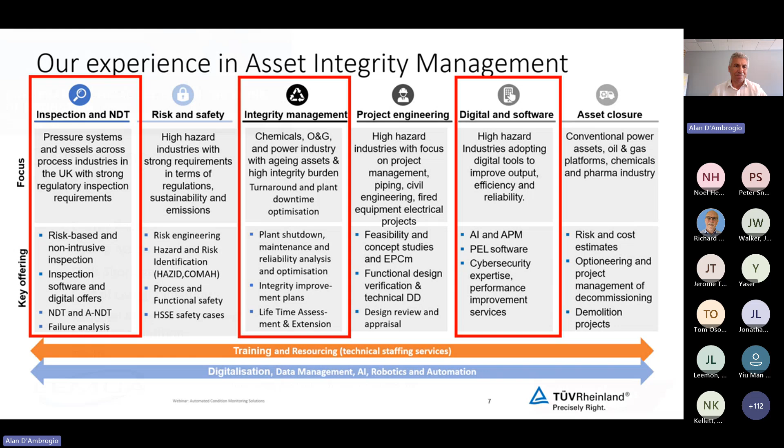Why are we here today? If you look at the news, we have very challenging markets at the moment, especially across Europe - high energy prices, aging assets, skills shortage, cost of living, inflation, impacted even further by the Ukraine war. That's resulted in a lot of operators in chemicals and refining with reduced margins and much greater increased global competition. And in the last 12 to 18 months, we're starting to see tariffs as well. So that's some of the climate.

But for me, 2025 has been quite noticeable on some of the announcements we've seen. The first one is Petro-Ineos in Grangemouth, around the refinery being shut down. That was announced last year, but in April it started its shutdown.

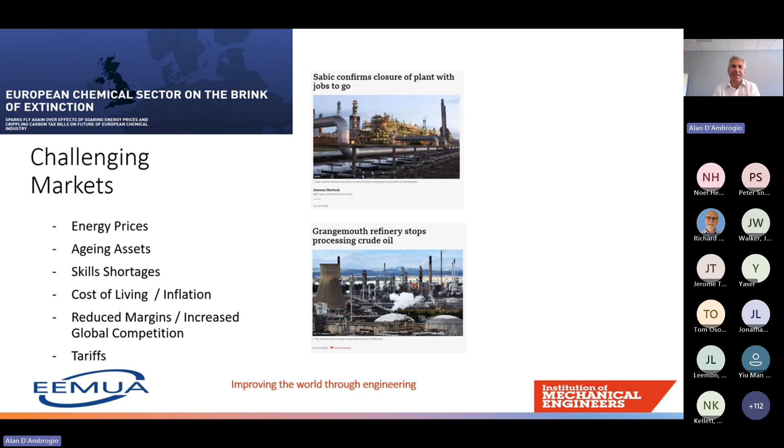Unfortunately, SABIC have an ethylene cracker on Teesside that's been shut down for a while for a large revamp and decarbonisation project, and the decision was not to start back up, with the resulting number of job losses. In July this year, you'll have seen Prax gone into administration, and that's a refinery in Humberside.

Lastly, Vivergo, again in the Humber region, the bioethanol plant has decided it can't operate competitively. So quite a strong headwind around competitiveness in European chemicals and refining.

And if you look at the top left-hand side, it says the European chemical sector is on the brink of extinction. I didn't make that up, that's on the INEOS website. INEOS is the second largest chemical company in Europe, and that's on their website.

So we're seeing strong headwinds in there. And the question is, what can we do to help? My background, I spent 4 years within ICI as a turnaround manager, so I just wanted to talk about how asset integrity and major turnarounds have an impact.

You'll see in the top right-hand corner the turnaround manual we had in ICI, issued in 1995. Turnarounds tend to be infrequent events, maybe every 4, 5, or 6 years depending on the plant. Some plants do them more often, but we see lots of confined space work, bringing a lot of contractors onto site.

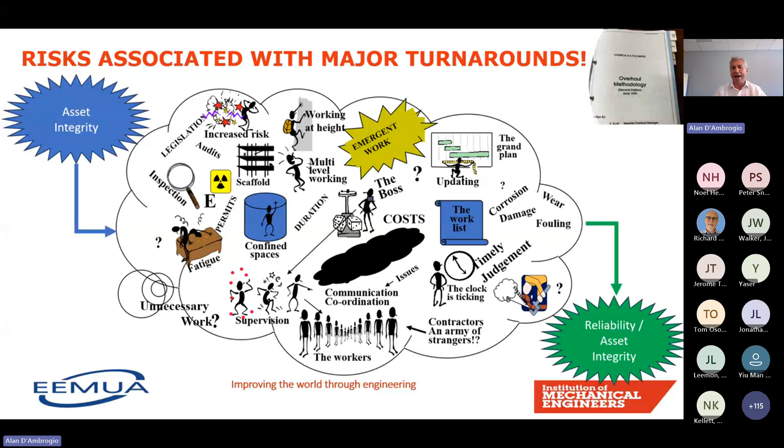We have this large event that we spend millions on. We bring a lot of strangers onto site to actually do some work. But what that event also does is define the asset integrity and reliability of the plant for the next 2, 3, 4, 5 years, whatever the interval is between turnarounds.

So how does asset integrity impact turnarounds and business profitability? Turnarounds tend to be the single biggest contributor to business performance in the financial year they're in. That's from the maintenance spend, the lost production, availability, OEE, production efficiency, whatever you may call it, and potentially also safety performance, because of the complexities of the work being done.

So asset integrity has a huge impact around business profitability, both as an output around the performance and safety of the plant, but also as an input on what we spend on that plant. When I was in the turnaround team, we always used to have a saying: to succeed in a turnaround, you've got to get everything right; to fail, you only have to get one thing wrong. That comes back to the complexities of turnarounds.

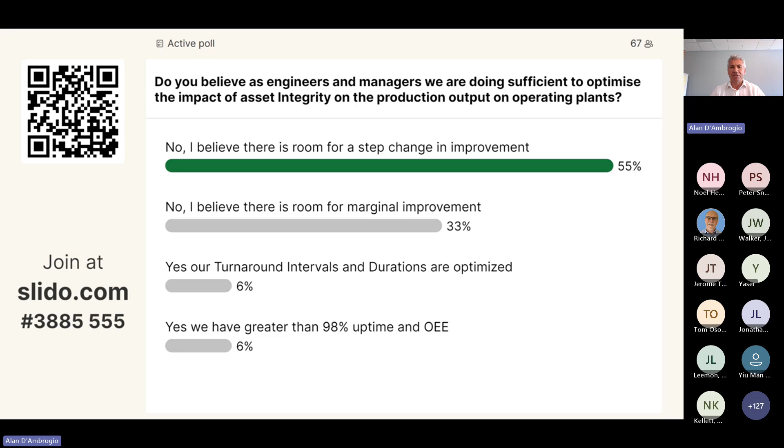So what we're trying to do is the IMechE, we want to try and transform asset integrity. It wants to be balanced. We don't want to have a safety incident. If we have a safety incident, it has a huge impact, whether it's on a turnaround or during operating plants. But we want to enhance the safety performance, increase production, and reduce our operational costs. That's what we want to try and do. And we want to try and bring industry together to look at how we can do that, utilizing the new technologies around. We've got AI, but also upskilling people on operating plants and people that support operating plants across there.

On the right hand side, you'll see Formula One. It was the first Formula One that was run 75 years ago. And in 1950, the average pit stop during Formula One was 67 seconds. In 2025, so 75 years later, we're talking about an average pit stop between 2.5 and 2.7 seconds, and the fastest is 1.94 seconds. So we've seen a radical step change around how those cars perform and how we maintain those cars.

So what we want to try and do is bring that same force, that same thinking, into the high hazard process industries. It doesn't mean we will do our turnarounds in 60 seconds or 2 seconds, but it does mean we will adopt the technologies that we see in other sectors into the high hazard sector. So more effective asset integrity strategies, shorter and more cost efficient turnarounds, maybe increase the interval between turnarounds if we can as well, but improving the uptime and production output. So that's what we're trying to do.

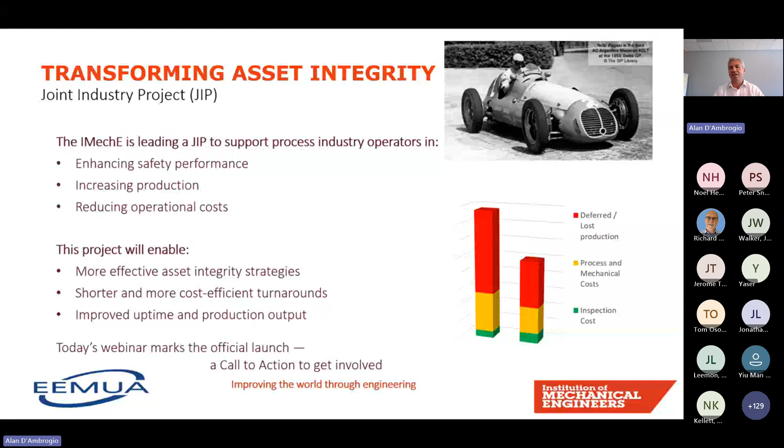If we understood what the condition of equipment is, maybe we can do things differently and we can transition to what we see on the right-hand side. I'm not going to go through this slide, one for time, but also David Glass will talk about this in his slide as well. In the UK, there is no legal requirement to go into pressure vessels. I know that's different in different parts of Europe, though. But I'll let David go into this slide.

I've just put 3 slides in, which is the case for change in there. And then I'll hand across to the other speakers. Sorry,

upstream. Back in 2017, we were then part of ABB. We actually conducted a study for the Oil and Gas Technology Centre to look at how we can support upstream operators and what's stopping the uptake of advanced technologies and non-intrusive inspection.

So we conducted a survey across a number of operators. What we found as the outcome is there was a low level of NII usage in the basin. There's a potential, when we did interrogation on a number of companies, for a 42% cost saving. I know some of these facts are disputed, but for me, the biggest thing is there's a lack of visibility across many operators of what the true cost of asset integrity is.

And this is another picture of the same things. There's many barriers for uptake of technology, behavioral and commercial. It's not just about the technology. So number two, opportunity for change, was a study that we did from 2020 to 2024, and that was to implement asset integrity across a number of refineries and ethylene crackers in Europe.

So there was an opportunity to reduce it. The main reason this study was conducted was to stop the unplanned outages and stop the failures. It wasn't to cut cost, it was to stop the unplanned outages and failures.

But what we did find is by emboldening asset integrity, by digitalizing asset integrity across the sites, looking at equipment criticality, corrosion control, and so on, we were able to bring new inspection techniques and new ways of working that actually supported OPEX cost reduction, improved safety, and improved uptime. And I'll talk about this a bit at the end as well around some of the values we did there.

What we also did for the operator right at the start is produce this thing called the value gap. And you will have seen that value gap when we talked about offshore. And this is one of the deliverables we'd like to see for the joint industry project: what is the value gap for us to do something differently? And what are the challenges for us to do something differently?

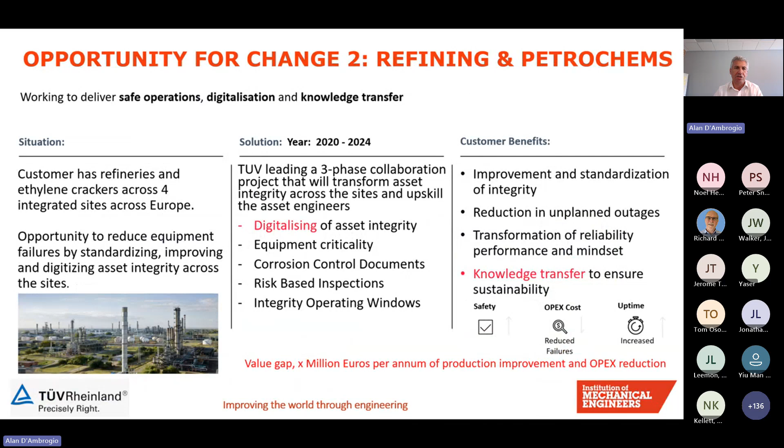We've also seen a lot of drone usage and robotics and how that can benefit as well. So how can we bring that into how we conduct asset integrity, and then data analytics and artificial intelligence in there. The last part we won't cover in the JIP, but there is a webinar in a week and a half's time by the IMechE that will cover this, and you'll see that on the end slide.

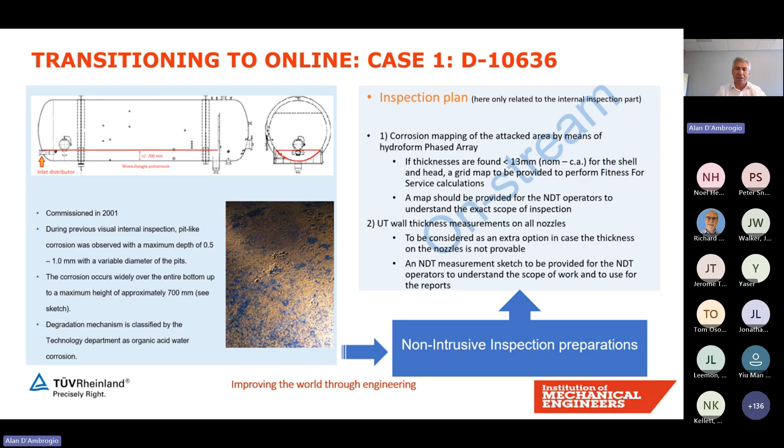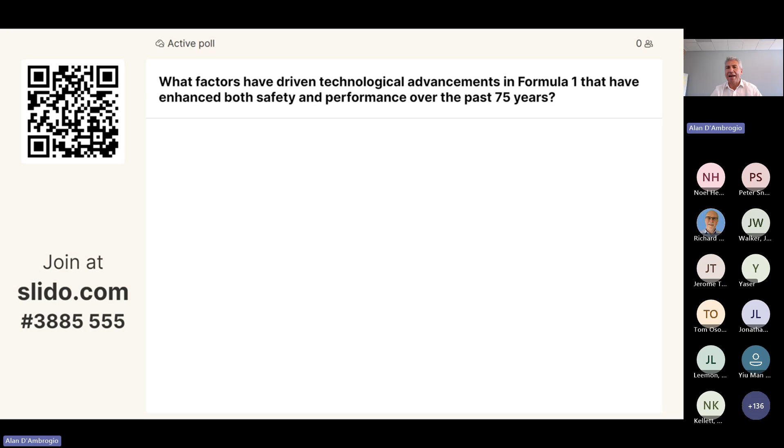Okay, poll question number 2. What factors have driven the technology advancements we saw in Formula One that have enhanced both safety, Formula One cars are safer than they've ever been before, and performance over the past 75 years? What's driven that? Maybe that's lacking in our process industries. And this is a word cloud. If you can type your responses in there, short or long, it'd be good to understand what's driven that industry that we're not seeing in our industry.

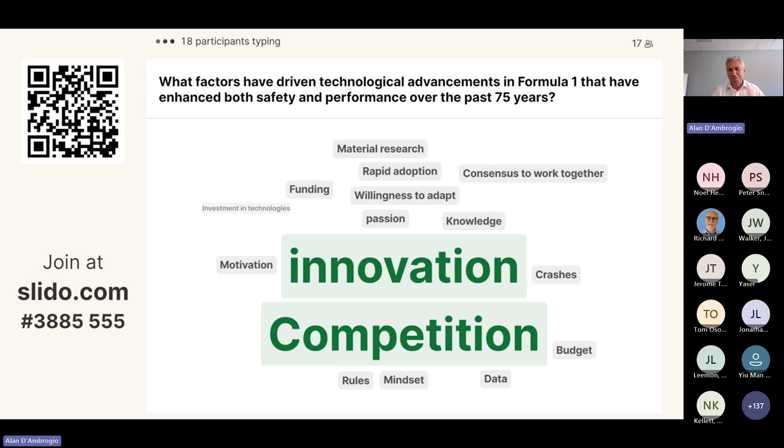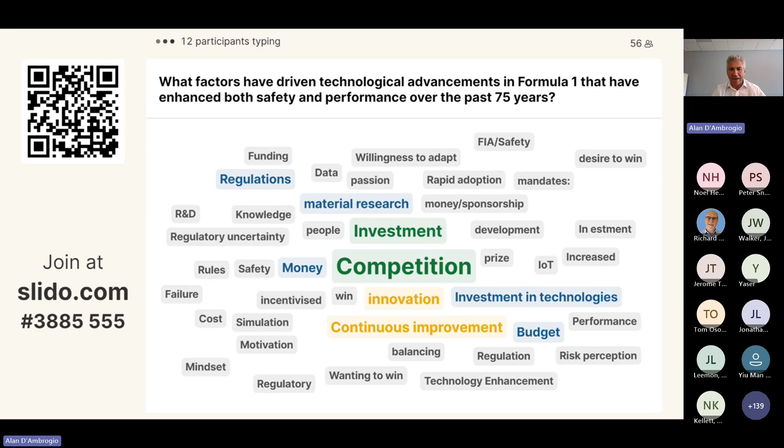So competition, as a service provider in the high hazard industries, I would say there's a lot of competition in the high hazard industry. Investment, maybe innovation, budget, regulation, FIA safety. Willingness to adapt, mindset. I saw right at the start, motivation, wanted to win.

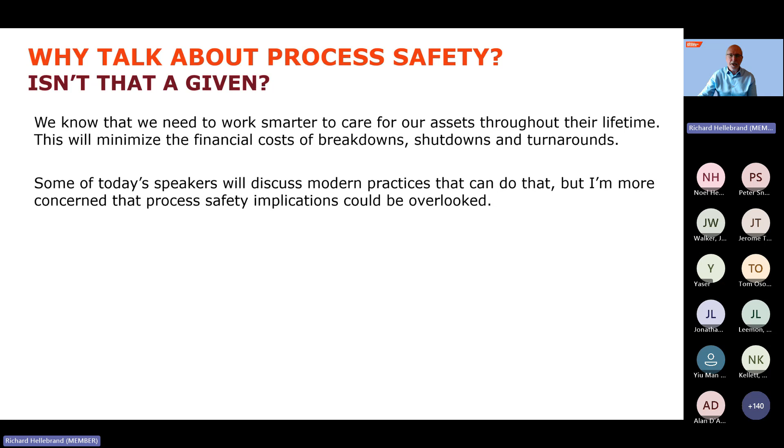So, isn't it a given that we have process safety? Well, we do need to work smart. We know that on maintaining assets through the life, we've got to get the costs down, and those come from breakdowns, shutdowns, turnarounds. Alan's already alluded to that. And some of the speakers will talk about some good modern practice that can do that, but I'm really concerned that process safety implications could be overlooked.

So I'm going to look at a few examples of failures that were avoidable. And they include big near misses, if you like, and small events, but they were almost disasters. Unfortunately, I have a whole catalogue of these things I could share, but I'm not really allowed to because of confidentiality. So the fact we're repeating these things, it sort of hints at declining technical competence and knowledge in the industry. We want to arrest that, obviously.

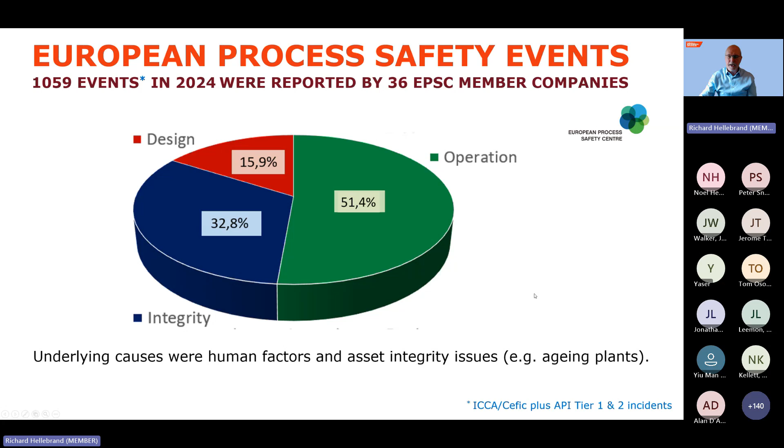This pie chart is compiled by 36 European-based multinational chemical companies. To give you a feel for this, the combined working hours for those incidents was 2.5 billion working hours. All of their internal incidents that are either CEFIC based or API tier 1 and 2 based are reported and analysed. And you can see more than half are operations, and when we look through them, really we're talking about human factors, and then a third are asset integrity as well. There's no clear dividing line between them, because knowledge can often lead to asset failures. So I'll give you a few examples.

I'll start off with flanges. Now, this is from 2021 in the US. They were trying to start up a hydrogen fluoride unit. An operator noticed a small leak at a flange. He went over with his BA on and checked it, radioed for help, and another operator came over, but the joint suddenly blew out. And the second operator didn't have the right PPE. He died.

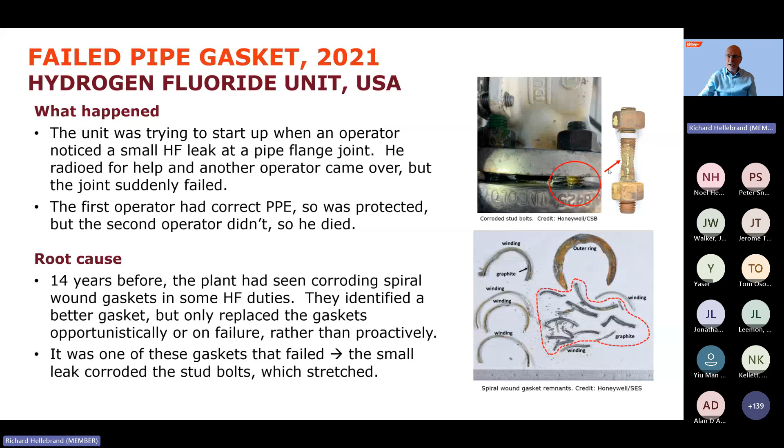But 14 years before, they'd identified corroding spiral wound gaskets as a problem in these duties. They found a better gasket, but they decided just to wait for them to fail or to change opportunistically rather than proactively. And that resulted in someone dying, because you can see from the photo on the right, we had stretched bolts, and then obviously it failed, and you can see the state of the gasket.

Another example, this was from last year, and this was a large monomer sphere in the Netherlands. I've got a photo of the actual sphere, but I haven't got permission to share that, so I'm sharing a freebie off the internet, but it's a very similar looking sphere. They were loading vinyl chloride monomer from that sphere into a ship in the nearby harbour when the gasket, which is a tanged graphite gasket, suddenly failed. You can see the photo on the right, that is the actual leak. And it's a nightmare for maintenance people, or anybody really, because it's the first gasket after the sphere, it's non-isolatable.

Now, they flashed off nearly 2 tons of vinyl chloride during the incident, but most of the sphere they were able to empty into the ship. Now, if you haven't come across vinyl chloride, it's very similar to LPG, very, very flammable, but it's also a carcinogen. So it's not a good day at the office when this happens.

Luckily, it didn't ignite. No jet fires, no explosions, nobody hurt. But this is in central Rotterdam. If that went up, it would have taken out a lot of Rotterdam and killed people. When I got the details from the company that did it, it turns out they hadn't got a procedure for tightening bolts up on high hazard flanges. And so the bolts were under tensioned.

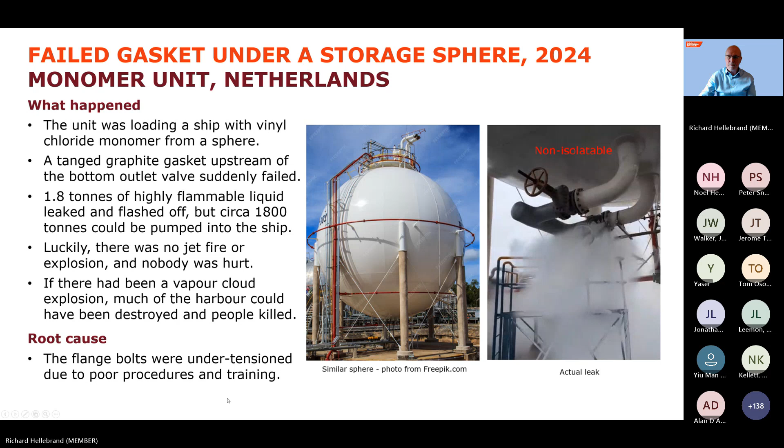Now, these are a couple of slides from Chris Mellows. You may have seen these before. There's the link there on the bottom of some of the defects he comes across in his company, Zulu Joint Integrity, when they inspect, mainly in turnarounds, the quality of the joints being put in. You can see some absolute horror stories in there. The worst ones being the use of grinding discs as gaskets, but short bolting or modifying the gasket or over tensioning are also common.

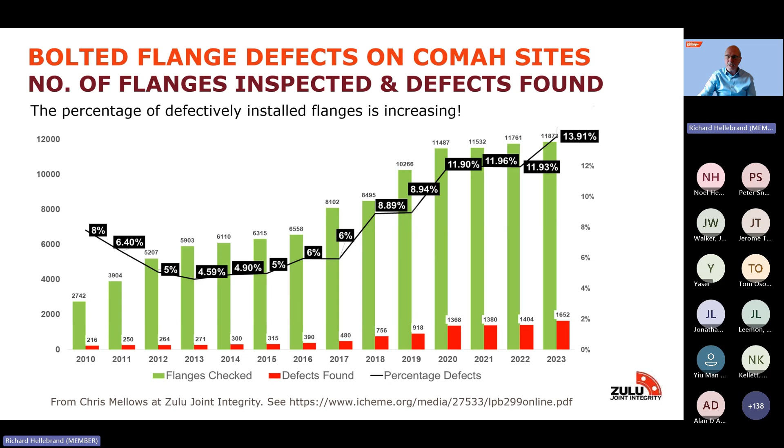And this goes back about 15 years when he first started his business. About 8% of what he inspected was defective. It's now up to 14%. It's going up. So for the last 10 years, that's a straight line going up of badly installed gaskets. Now, a process safety event requires a loss of primary containment. Well, the easiest way is for the gasket to leak. And so this is going to get us in real trouble if we don't sort it out.

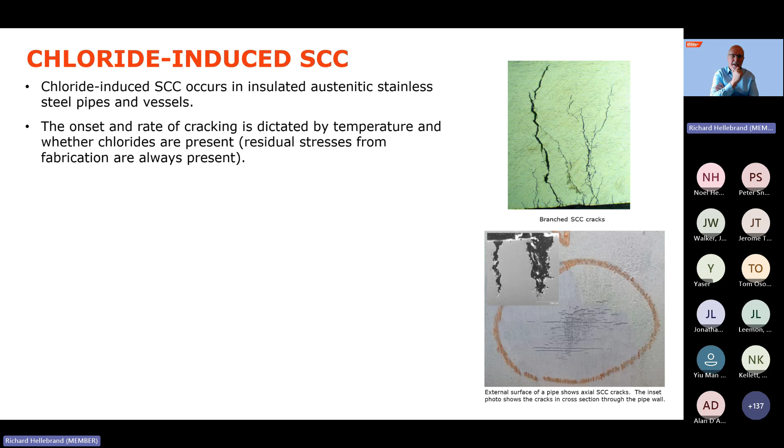Firstly, what is it? Well, it happens in insulated austenitic stainless steel pipes and vessels. The cracking is dictated really by the temperature and whether the chlorides are present. The stresses are always present because most of this equipment is welded, so you've always got stress in welded equipment. And the chlorides can come from pretty well any source. That could be in the insulation, the process itself. They could be just on the wind, or even tap water if it's the wrong tap water. So even low concentrations are enough to start the cracking.

And anything above ambient will mean that solution with the chloride evaporates. As soon as it evaporates, the chlorides concentrate up, and eventually they start filling up the little cracks and pits that are obviously available around welds, and they become stress concentrators and start it off. You might not even notice it's leaking because they start off as tiny little cracks.

Now, I've just got a couple of photos on the right. The big one on the bottom right is what the surface of a pipe looks like, but in cross section you can see in the cutaway the cracks are progressing their way through the pipe wall thickness. Now, they won't leak until they get through, but when they do, you might start off with a really small leak, but it could turn into a really big leak. And it looks similar to general fatigue. The difference is it doesn't need cyclical stress, whereas with fatigue, you're compressing and expanding and moving stuff around.

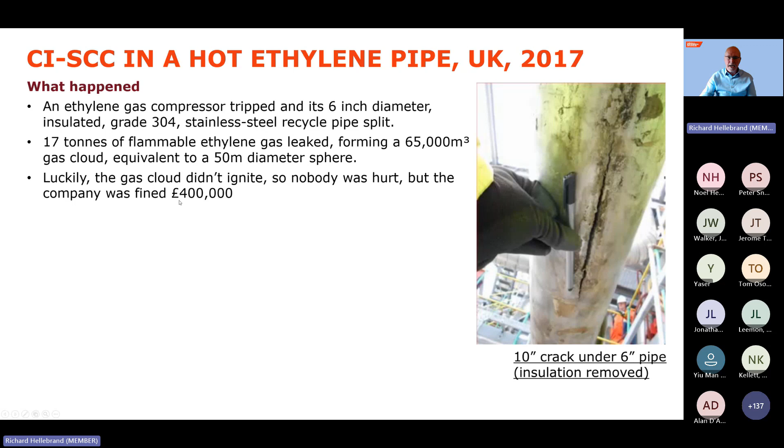So the example, I won't say where it is, but it was in the UK in 2017. This was an ethylene gas compressor. It tripped. It had a 6-inch recycle line around the compressor, and that pipe split. And it's a stainless steel pipe again. You can see the photo, I think an HSE inspector's holding their pen against it, but it was a 10-inch long crack. This is the pipe without the insulation on. 17 tons of ethylene gas leaked out, forming a very large gas cloud. Luckily, again, it didn't ignite, but it was near to cracking furnaces. It could so easily have happened and become a disaster. And I think a year or so ago, the company was fined about 400,000 for that.

Root causes: chlorides and stress corrosion, and it's next to the coast. They couldn't find anything else that could contribute the chlorides. There'd been an RBI study, that's risk-based inspection, to set an inspection strategy. Nothing wrong with that. It's good best practice. But the team had made a mistake. They'd adopted a corrosion loop approach. The recycle pipe comes from the discharge to the suction. Really, it should have been attached to the discharge for the study. They grouped it with the suction. The difference is that the suction's minus 100 centigrade, whereas the discharge is above 80. And because of that, they assumed that stress corrosion wouldn't be possible, and they didn't strip off the insulation to check. You know what they say about assume.

And then another one. This is my own plant near Blackpool at the time. And this was the average minimum temperature on the graph on the left from 1990.

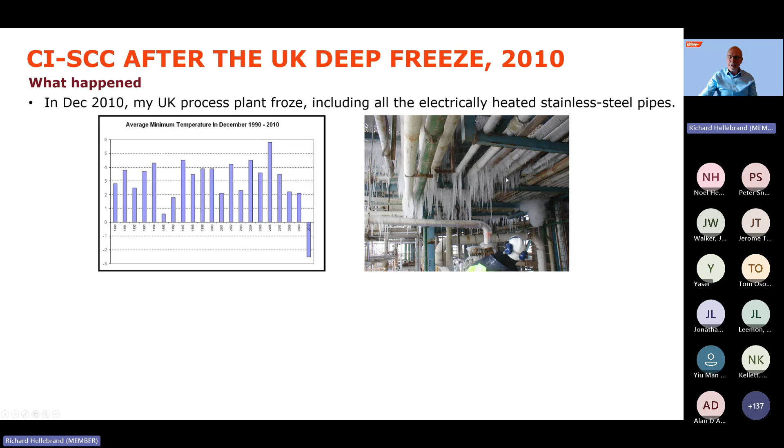I think all of you who lived through 2010 recognise that it was a terrible winter, way, way colder in November and December than we'd ever had before. You can see the icicles hanging off pipes in this photo that I've got from the plant.

After the thaw, my electrical engineer renewed all of the electric trace heating with better stuff, because he thought that'll stop it, it'll never happen again. He didn't check with me, and he didn't do an MOC, a management of change.

So over the next 2 years, quite a number of these newly traced stainless steel pipes failed, and there were lots of leaks. And the root causes, well, again, that plant at Blackpool is near the coast, so you get the salt and the chlorides - and these pipelines were continuously welded.

Now, the pipes hadn't corroded for 30 years at all before then, but when the heat tracing was put on, the spot temperature reached 90 degrees, even with thermostats. I did some trials, I could prove it. So you get a sawtooth effect. Although it might maintain a nice average low temperature, the hot spots were very, very hot, and that started rapid stress corrosion.

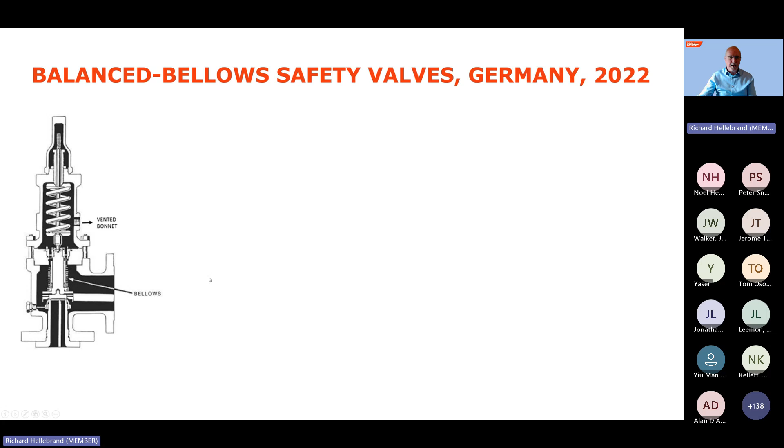Another example, this is safety valves. You'd think that safety valves are 101 for protection against pressure events. I did some audits in 2022 and found a whole bunch of safety valves wrongly installed - around 200 safety valves across some plants. The installers had not conformed to the original equipment manufacturer's installation instructions or to the technical code that refers to, which is API 520.

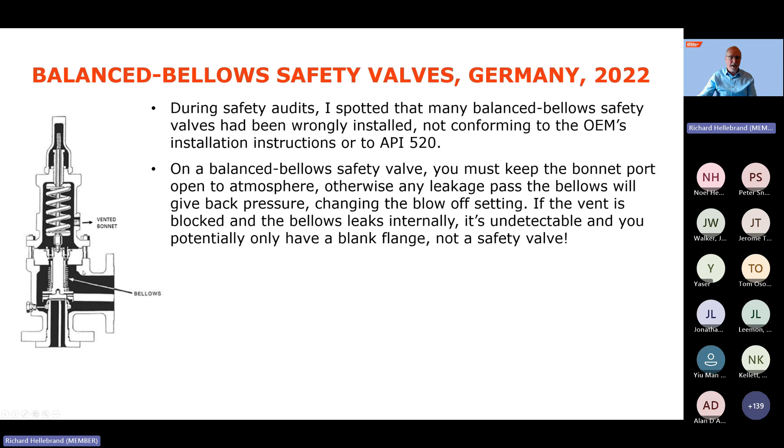And basically what it is, on a balanced bellows valve, you have a little bellows - I don't know if you can see it in the cutaway - and it's to sort of insulate the setting of the valve, isolate the setting of the valve from back pressure. This happens in long discharge lines, for example, to manifolds. But for it to work, the bonnet on the top has to be vented to atmosphere.

If you don't do that, if the bellows leaks internally, you get a build-up of pressure in the bonnet itself, and it can equalize - effectively you end up with a blank flange, not a safety valve. So very serious.

The manufacturer shipped these with transport plugs and warning stickers to remove them, but they'd all been left in, including the warning sticker, and often painted over. Some of these valves were even tagged as OK by the inspection authority, with no paperwork to justify that.

And the engineers didn't know they had a problem. I'm not talking about young graduates here - I'm talking about people in their 50s as well, who just didn't have that knowledge.

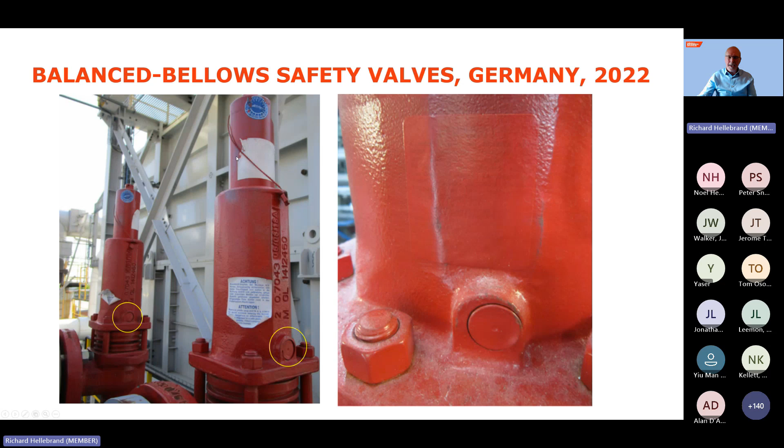A couple of photos. You can see clearly the plugs left in here, the warning stickers - this one's in German and English. And sorry, Alan, but a nice TÜV tagged, lead sealed cap on it to say everything is great. It's not. And this one's painted over.

That's the sort of end of the examples, but turnarounds are dangerous, potentially very dangerous. Hopefully we'd never get anything like Texas City - lots and lots of people were killed and injured, and it happened during startup. I'm not going through the details, but you'll find it online - the CSB have some great animations and reports.

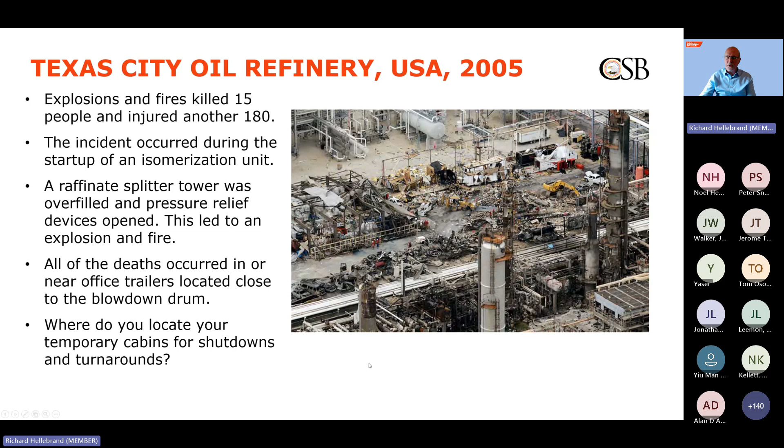This is about temporary contractors - a lot of them were killed in the cabins. What do you do with your own cabins? Have you learned from this? Not just the other things - have you actually learned where to put your people during the turnarounds?

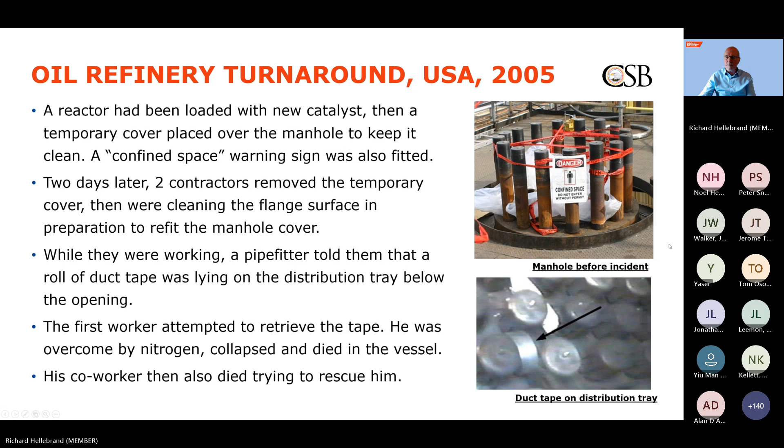So, summary of this: there's lots of corrosion, maintenance, inspections, turnarounds, failures. They're not new, but to deal with them you've got to have trained, experienced engineers and technicians. Many of the problems are related to aging assets, which we've all got.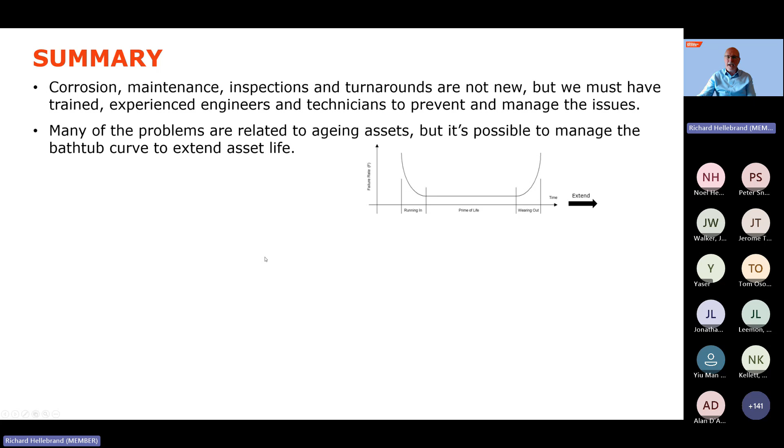But if you're in asset integrity and maintenance, you know that you can extend, and we have to extend that bathtub curve to the right to extend the asset life. And it's very possible. It's not easy, but it's possible.

But the biggest downtime is the shutdown. Alan's already mentioned that. They're expensive, they're resource intensive, horrible things to plan, and often result in startup issues, which add extra costs and can have safety implications, particularly when we add in lots of potentially untrained labour.

But yeah, we can reduce the need for shutdowns, or at least limit their extent, but we've got to have competent people, and we have to assess the accurate condition of our assets. We don't want Mickey Mouse inspectors.

We want really competent, experienced people. And when we've got accurate condition, then we can tailor inspection strategy. Then we can look at these other smart techniques and what can be used. If we don't share this knowledge, then people are doomed to repeat it. We're going to have safety incidents, hopefully not disasters, but it's possible. And certainly the failures and costs will carry on.

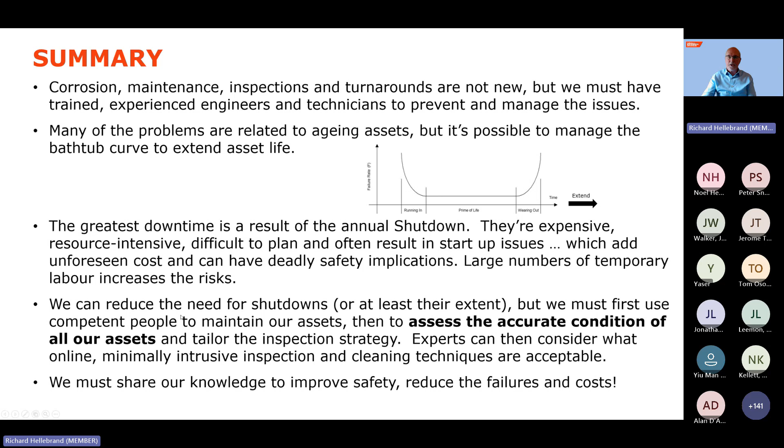That's me done. Contact me outside if you want to talk about any of this stuff, but you'll get the slides later. And Alan, back to you.

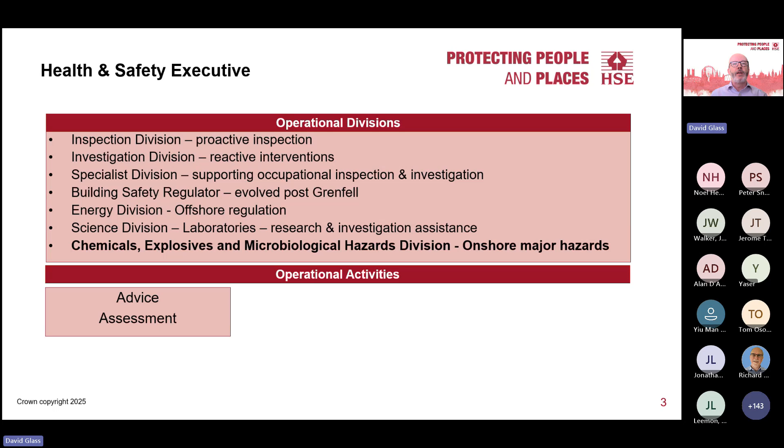What we like to do is give advice in the first instance. We don't want to go further than that if we can help it. And thankfully, in most cases, we're dealing with relatively well-informed companies, and advice is where we stop. Part of our regulation, though, regards assessment, and some of you who operate COMAH sites will know that we assess safety reports for the riskiest sites.

Our duties also extend to inspection, so we will knock on the door and ask questions of those people who operate major hazard plant. Invariably, when things go wrong, we undertake investigations as well. What we don't want to get to is enforcement, but occasionally we have to do that. So we try and stick to the basic end of advice.

My role is slightly different to some of the other colleagues you may come across. I run a team who also undertake some research. We take issues that we find from high hazard and asset integrity inquiries and incidents around the world and think about what we need to do as a regulator to predict where the challenges and risks may evolve. So I initiate some of those with colleagues in science division. Inevitably, as a mechanical engineer, our main focus is on aging high hazard assets, but recently also some challenges with new and evolving technologies and new applications such as hydrogen and net zero.

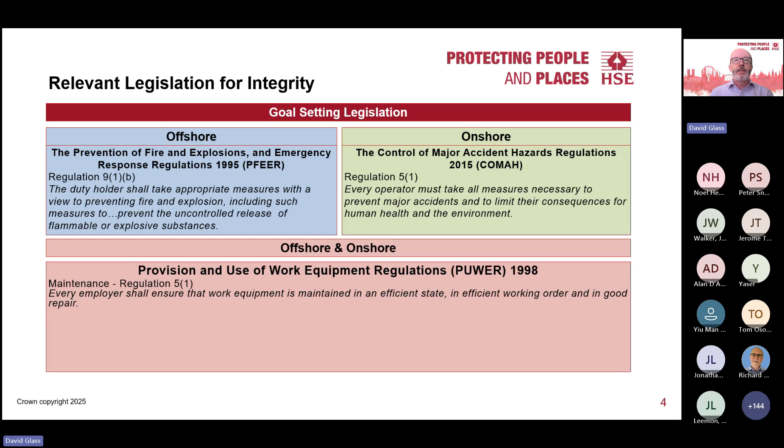We do that typically using, I guess, the most accessible tool for us, the Health and Safety at Work Act, but targeting asset integrity are the Provision and Use of Work Equipment Regulations. It's incumbent on operators and employers in that case to maintain their equipment in an efficient state, efficient working order, and in good repair. So that's quite a high bar. You basically can't run it into the ground, is effectively what the regulation says.

And plainly, to get to that efficient state, you have to keep an eye on it. So the inspection regulation dovetails quite nicely with the maintenance regulation. If it deteriorates and if it's going to result in a dangerous situation, you have to inspect to maintain it in good repair.

I should also point out, on the onshore arena, we have the Pressure Systems Safety Regulations, which is important because it introduces the concept of written scheme of examination. It talks about a competent person. It has other aspects to it. For example, you're allowed only to postpone an inspection once. So if it's qualifying equipment, anything over half a bar with a relevant fluid in it, you have to adhere to those regulations too. And there are some significant principles in PSSR that we extend into the COMAH onshore arena, like the written scheme, like postponement, etc.

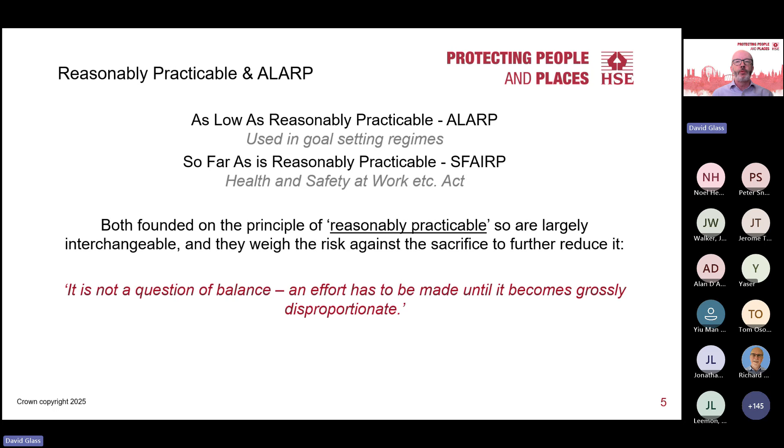So it's founded on the principle of weighing the risk against the sacrifice to reduce it. And there's a quote which accompanies the Health and Safety at Work Act: it's not a question of balance, an effort has to be made until it's grossly disproportionate. I think the key here is to remember the phrase reasonably practicable. What is reasonably practicable for us to undertake? If you remember that, I think most things will be okay.

About making an effort, in the COMAH guidance, I think we plainly have to admit and recognize that we are taking a risk when we actually produce chemicals, for example. We can't eliminate that risk, that would be offshoring it to somewhere else, and plainly we want industry in the UK. So we recognize that the risk exists. But what we do say is that we should consider that risk and challenge ourselves based on a hierarchy: eliminate first, then prevent, control, and then mitigate. So those are quite clear principles.

In order to prove as low as reasonably practicable, in the first instance, we rely on relevant good practice. Relevant good practice is not hugely well defined, it's not listed anywhere, but it's generally a consensus. And the important part here is it's driven by industry. We have an input to it, but it's a consensus opinion amongst those who are best informed as to what measures are necessary. We lean on relevant good practice a lot. I guess this is the opportunity then to introduce what we regard as relevant good practice when it comes to non-invasive inspection.

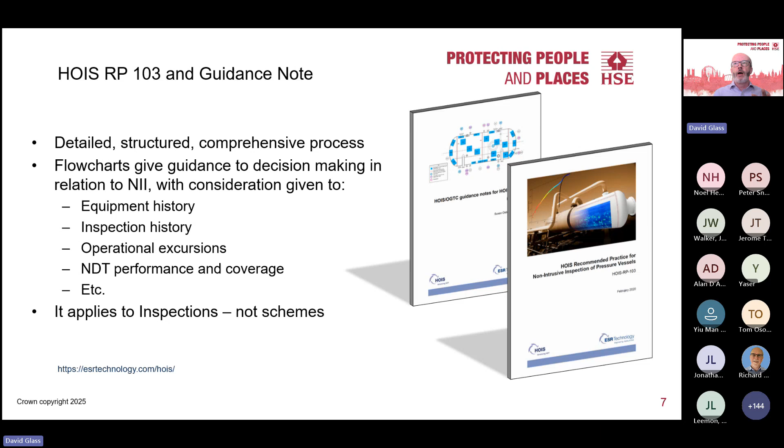And it applies to individual inspections. It's not there to change a written scheme in its entirety. It's there to consider any one inspection, and can you change any one inspection to non-invasive? The inference being that the longer you go and the more non-invasive you do, potentially the less reliable your data may be.

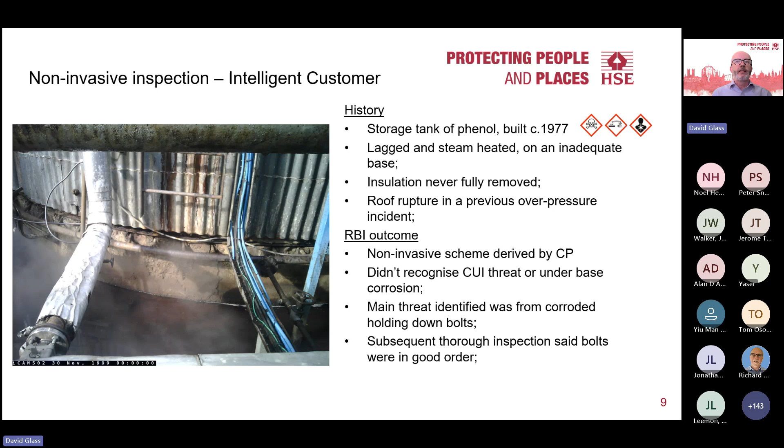And subsequent to that RBI, the same competent person inspected this tank and said, yes, it's in good order, and the holding down bolts were in good order. It didn't take long to ascertain that there are no holding down bolts on that tank. So this RBI was effectively debunked, and plainly the inspection was debunked as well. Really disappointing that it takes an HSE as a regulator visit to get people to reappraise. And there was no pushback from what should have been an intelligent customer in that instance.

I also said I would talk a little bit about research. This is some research that I initiated some years ago, just prior to COVID, unfortunately, in relation to remote visual inspection. Now, the findings have yet to be published, which is slightly irritating, but I expect something hopefully towards the end of this year or early next year, published by the Energy Institute, which takes our research and adopts it as relevant good practice. But nonetheless, I can talk about some of the findings.

Generally, remote visual inspection was poorer than close visual inspection in most instances. Not as successful at identifying the nature of features as close visual inspection, because RVI has inherent limitations. For example, oblique viewing, depth of field, lighting issues, and you can't actually physically feel the surfaces.

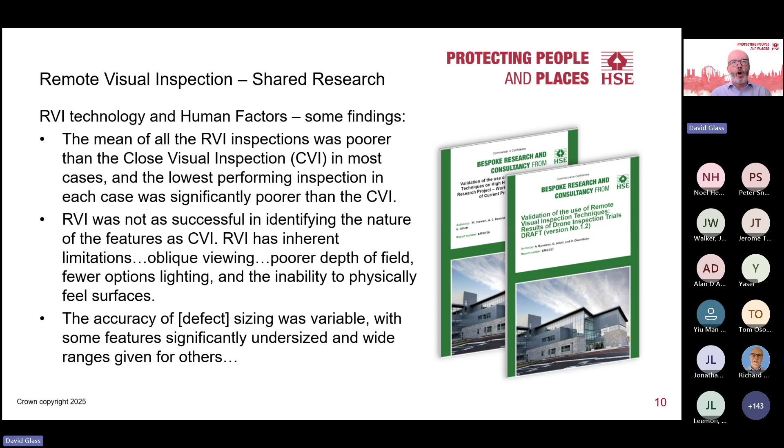Defect sizing was variable, and some features were significantly undersized. That's for crack-like defects, and for diagnosing corrosion as well. This is on multiple platforms, including drones, but also within vessels. So a word of caution about techniques that we may adopt in order to avert vessel entry for humans.

A little bit about lessons from other major accidents. I was scouring the Cullen report, which is in two parts and readily discoverable on the internet. I would encourage everyone to read that, and perhaps watch the BBC documentary airing starting this week. But there are some lines from Lord Cullen which struck me here.

There's a danger that compliance takes precedence over wider safety. The major accident issue was largely taken for granted, and they thought it couldn't happen to them. The compliance was with respect to company procedures. In this instance, it was in relation to the divers, and the deluge system was turned off while the divers were working underneath the rig.

The deluge system was never turned back on Piper Alpha, and I think, pretty much without doubt, that contributed to the scale of the disaster and certainly the speed of it.

There is, though, another part of Lord Cullen's comment there: that sound innovations are discouraged. I would agree with that, and I think some colleagues will go on to talk about AI, machine learning, etc., and what that can do for us, but also advances in NDT. I think as a regulator, we need to be receptive to that too.

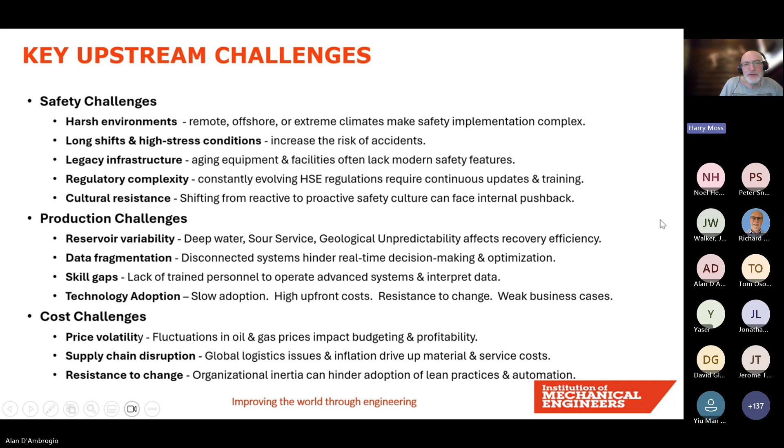We've got supply chain disruption. We could call that Trump tariff land. So we've got global logistics issues and inflation, which drives up material and service costs. And then we've got resistance to change, that organizational inertia, which hinders the adoption of lean practices and automation. Let's just do it the way that we always have. So these are challenges that prevent the adoption of technology. Next slide, Alan.

Okay, so I'm going to talk about each of these in turn. From a safety point of view, some of the technology that I'm aware of in major opcos includes drones and robotics. So these are now routinely used for flare stack inspections and robotics for undersea operations. They have the benefit that they reduce human exposure to hazardous environments.

Another innovation I'm aware of is advanced monitoring systems and predictive analytics. So real-time sensors, the Internet of Things devices, bringing in AI for monitoring systems to track equipment health and predict failures. So an example might be the monitoring of choke valves using permanently installed UT sensors. That data can be married with sand production. So you can make decisions about, do we increase production, knowing that we are going to increase the erosion rates, but it's operating within an integrity operating window.

We have safety management systems. So we could think about those in terms of Swiss cheese or bow tie type environments, building blocks, which can be verified and audited. We can have assurance programs. These frameworks can be driven by leadership commitment and risk assessment and support emergency preparedness. Essentially, it's the blend between integrity and process safety.

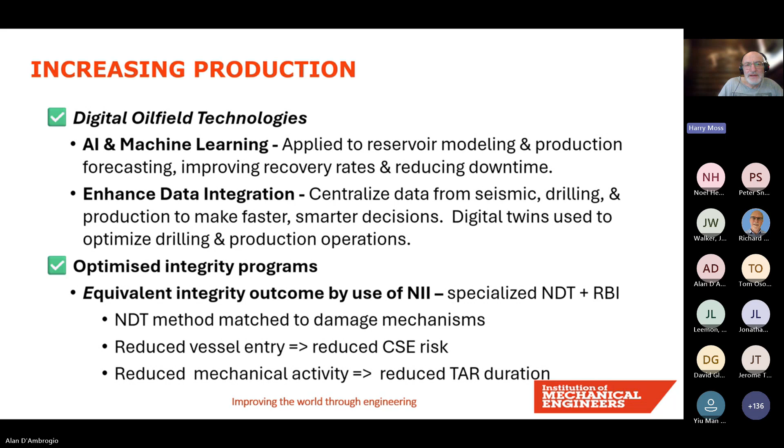So when you consider, for instance, a typical 100,000 barrel a day platform, each day that platform is not producing is a $10 million loss. So the way that in some major companies NII is talked about to the senior executives is the equivalent of bringing a new field into production. So the value is there in their mind in terms of increased production. Next slide, Alan.

Okay, in terms of reducing costs, I've broken these into 3 areas. So lean operations and logistics optimization. This might be around marine fleet rationalization, the transfer of oil in tankers or gas in LNG vessels. So what has been seen by this optimization is a 20% saving through optimized scheduling and usage.

There's having standardized equipment and processes, so that has resulted in a 10% variability and simplification of maintenance. So we're bringing in things like optimized sparing, for instance, not just across one asset, but across a number of different assets, or the sparing might be owned by a vendor.

And then permit to work streamlining, for instance, just avoiding that waiting around for permits at the beginning of the day, doing the permits the night before, can lead to a 20% efficiency improvement through work authorization.

And lastly, the use of remote operating centers. So for instance, reducing the number of people on the platform improves the process safety risk. So it's essentially operations from the beach or operations more remotely, and analysis of that data to optimize operations.

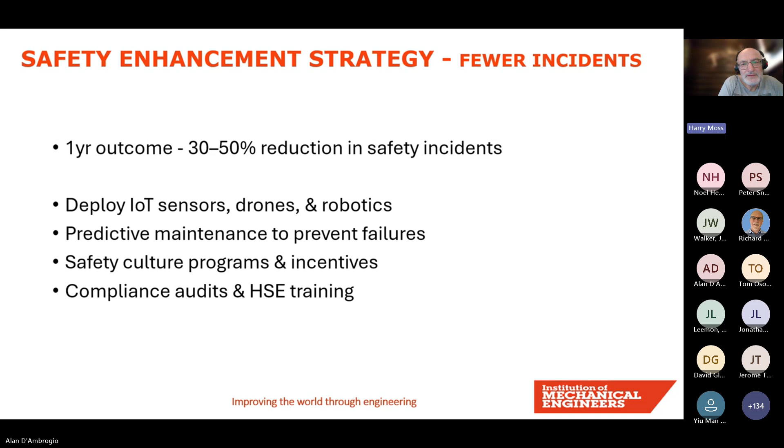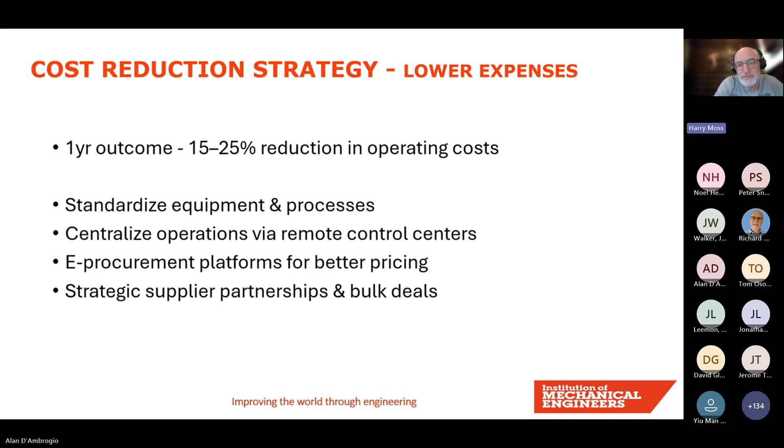Okay, in terms of cost reduction, lowering expense within the company, I think a 1-year 15 to 25% reduction in operating costs could be achieved by standardization of equipment and processes, the rationalization of spares, centralized operations via remote control centers, moving into an e-procurement platform for better pricing, and having strategic supplier partnerships and bulk procurement deals. Next slide, Alan.

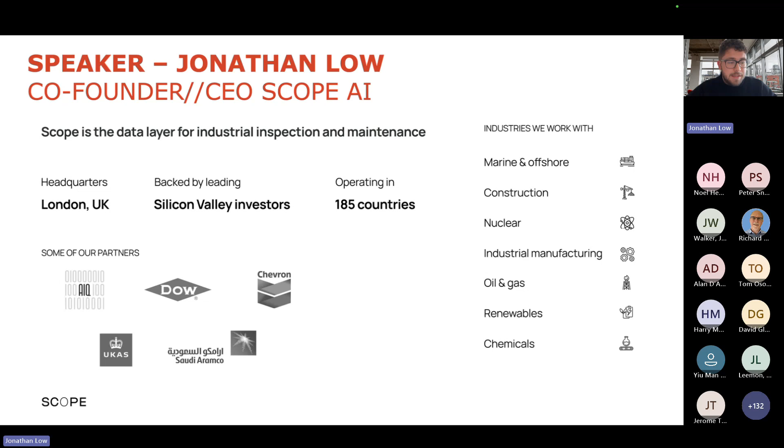And it's exciting what we've learned over the past 2 years. I think I've been on 20 different sites. I've done a ridiculous amount of training courses and confined space entry, and I've lost my PPE at least 3 times on different trains. So it's been really interesting to see - it's essentially a new world for me with my AI background and expertise, and to learn about opportunities for improvement in the space.

So what will we cover today? I'll try and be on time. Things that we'll talk about will be like how language models work - language models are a new type of AI model that have been developed over the past 5 years. Most things that you will have seen in the news over the past 5 years relates to them. We'll be talking about how things have changed. I'll be talking about 2 to 3 applications, depending on how much time we have, of applications to industry now. And to talk about some risks and considerations you should keep in mind when using these models.

Things that we won't really cover: historical ML models. We won't go deep into the technical details. We won't spend time talking about the mathematics or implementation of how these things work, although it's really interesting, and I'll be more than happy to answer any questions or get on calls with people to talk about any of those things, or how we've seen them in different plants or with different customers. And then finally, ethical or other concerns - there are many, and a lot has been written, but we just don't have enough time to cover it today. Great.

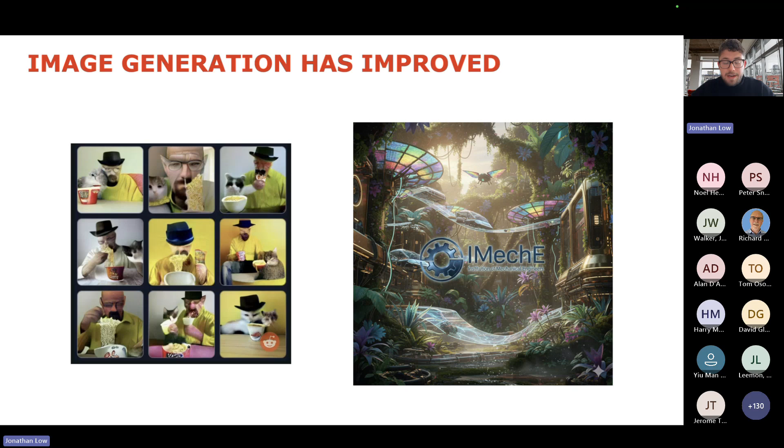What else has improved? We're seeing that models are improving. Actually, when you plot performance, you see hyper exponential performance increase, which is kind of scary. It means models are not improving only at an exponential rate across most benchmarks, but at a hyper exponential rate. Many people think it's because models can help generate training data for the next set of training - the better the model is, the better the training data. So you don't only multiply itself by itself, which leads to exponential growth, but you get to do that a couple of times because there's a couple of inputs that relate on this. So you get this hyper exponential improvement.

This is from January 2019. How long can models perform? GPT-2, which was one of the first models, could really only do tasks for about 1 minute. Now we've got extended tasks that can carry out the same work for over 2 hours - maybe doing some sort of research project or so on. Models are getting significantly better.

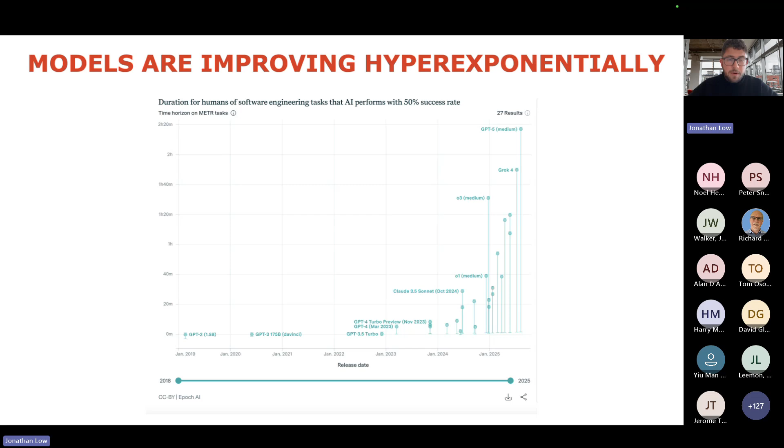There's a really good resource on this if you want to look into the sources behind this, by a company called Epoch AI. They publish a lot of really interesting data. Models are getting a lot better - there's wide ranges on outcomes. It's not going to tell you that things are 100% accurate, but in general, on core benchmarks, models seem to perform better and better these days.

How do these models work? It's a crash course into them. Historical models worked by taking a very specific set of data - maybe you had a set of ultrasonic thickness readings for different pieces of equipment over time. Then you would do something like a linear regression - essentially plotting the data on a graph and trying to work out what the thickness is next going to be over time, by mapping a line that best approximates that set of data. That works really well for one piece of equipment and some measurements over time.

But if you try and take that information and transfer it over to even a different piece of equipment, or you're doing something with radiography instead, or different sorts of measurements, it's not going to work at all. So models work quite well, but they're really localized to specific tasks. That's quite different to the models we see today - they're called large language models because they're essentially trained on all of the internet, all of human knowledge, on answers of PhDs. They spend hours just talking to the models and improving them.

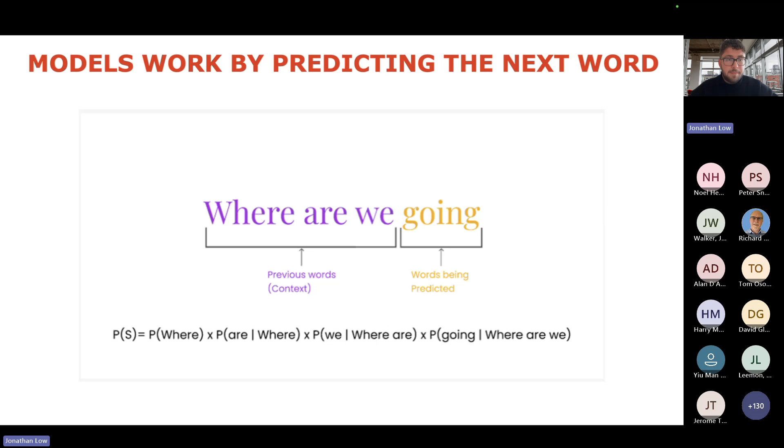To be honest, maybe we'll just ask around in your plant or other places - there's just really not that many people thinking about how to use modern technology, developed in the last 5 years, to make assets safer and more efficient.

This is a lot of what I spend my time thinking about, and what we help our customers with. How do we take these models, which can also be false - they're not 100% accurate, they're non-deterministic - and apply them to high hazard, high risk industry? Like many of you work at COMAH sites, places where you can't even take phones on site. How do you square these two things together? How do you square this growth of intelligence and this really useful tool with the industry you're working in?

Maybe you've got different answers, but my big takeaway has been: don't pass on decision making to models. I think this is a big mistake, and I always really wonder how companies work when they try to pass on a lot of this decision making to models. Instead, I would try to use language models to augment human decision making - to help people through training, through information gathering, through keeping information up to date, and through a bunch of use cases which I'm going to talk through.

So this is just important to keep in mind - I would really not recommend it. I think models are just not at the stage of intelligence, most models are not configured to be able to weigh evidence correctly, to be able to outsource decision making, but they are in a place where they can really improve decision making. If you use them properly, it can be really useful. I know there are a lot of skeptics, but I'd really encourage people to just try and play with them themselves, as part of my advice at the end of the talk.

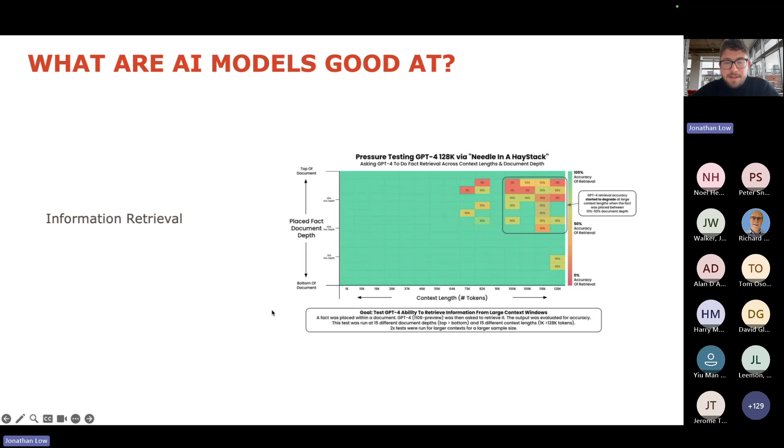So that's the first use case. Models are really good, and especially if they're developed correctly, there's a lot of applications here. So what are some of the applications that we've got? It's what we call data ingestion or information retrieval of that data that's been ingested.

For example, you can ingest documents like P&IDs, process and instrumentation diagrams. If you're working with hundreds of these and you've ever done a risk-based inspection study before, you know how time-consuming it is to go through and find every single piece of information. Instead, what we recommend is using models to find that piece of information and humans to validate it.

So maybe it'll give you a line number and a small picture of where that line is, and it would link back to a source document, and you can physically verify the information.

Other things it's really good at is scanning in and summarizing inspections. So if you're planning a shutdown, you can see what inspections are outstanding, what ones you need to work on. You can take in quite complicated diagrams. Models are getting better and better at this all the time.

There's not many off-the-shelf models that can do it, but if you tweak them and do some interesting things, you can take in words in different languages. Maybe you've shipped over a new catalytic converter from a different country, and you want to use that, but the GA and its manufacturing records are in a different language—you can use these models to do pretty accurate translation of that information.

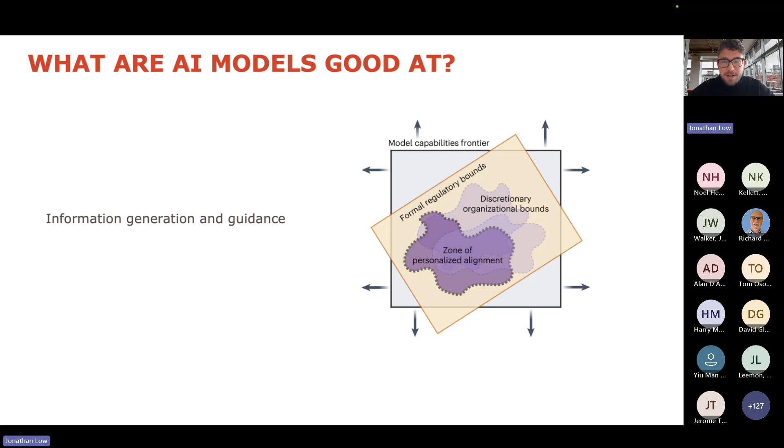A large application here is report generation for inspection reports, but also maintenance reports. A key here is to generate information sequentially with approval. You never ask a model to generate the whole report for you, or even to generate big chunks. You just say, generate small sentences here and here, get humans to approve them, get humans to edit them. Otherwise, you can ingest standards and written schemes of examination to ensure accuracy in the field.

Models are really good at taking in lots of different sorts of input. Historically it was just text, but now they can take in audio and video, and most models trained these days are trained on a variety of input. I'm pretty confident that Google's latest model was trained on all of YouTube, for example, and probably on a lot of your emails. Having all of that context means they can really understand what videos are like.

So a large application here is you can save hours if you set it up correctly on manual report writing. You can automatically catch some simple errors in the field. If you're taking information in, models can say lengths can't be negative, or flag a warning if thickness has increased, when you're doing CML readings or so on.

This was a larger point I wanted to make to finish off, thinking about one of the previous talks. We were thinking, well, technology is not always better. For example, remote visual inspection doesn't work as well as close visual inspection. But at the same time, we've got fewer people to do close visual inspection. Many people in the industry are retiring. But at the same time, there's much more regulation, much more learning, and less funding and less resource.

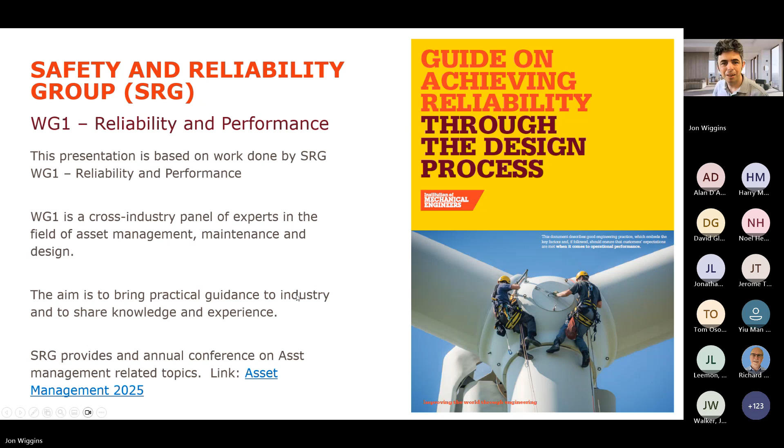So where do we start? We start with the classic iron triangle. You can have it good, you can have it fast, or you can have it cheap. In fact, you can have two of those, but not all three. The general balance is we want it as good as it needs to be so we can have it as quickly and cheaply as possible. But where does reliability and integrity sit in that? Should it be considered when you're planning? Unfortunately, usually it's not. It's usually the thing that's sacrificed. It is either forgotten or deliberately sacrificed to try and get a design, a project done. But what can be done to minimise this?

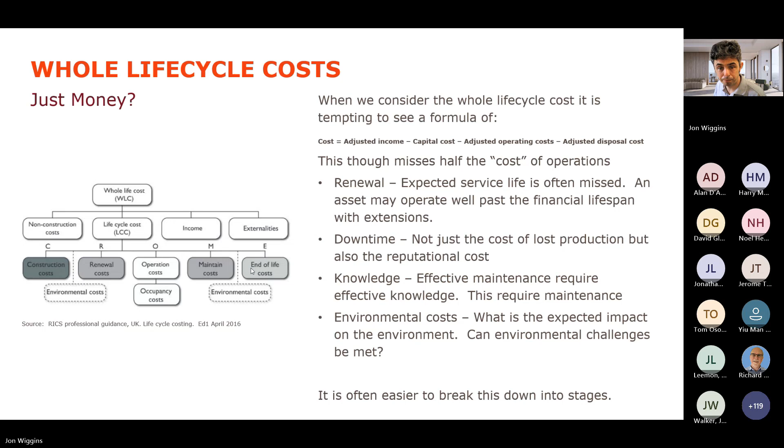This brings us to the management of risk. It's common in project management to just look at the here and now. What's in front of us now? What can we do about the risk that's in front of us? We're quite poor at looking at future risk and where are we in the future.

When we look at the future, we must look at what we can reasonably foresee. Now, this is quite difficult and is, in many cases, a form of guesswork, but the cost of not doing it is always greater than the cost of doing it. So we should take a more holistic view and look at not just now, but the implication of what's potentially going to happen in the future.

How do we do this? Well, the key thing is to have a process. This isn't just good project practice. This isn't just good engineering practice. This is good business practice. Having processes and using them. A process allows you to look at, okay, these are the stages. This is what's going to happen in the future.

And we can start to build a framework of, okay, this is what is likely to be needed at each of those stages. We can start to look at the big blocks of future planning. You can look at the physical requirements that generates, the organizational requirements, the human factors, and the competency requirements you are going to need, not just now, but in 10 years' time.

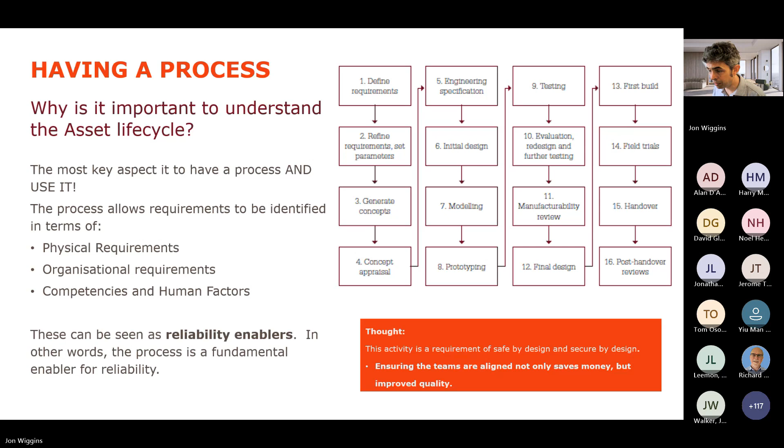So what happens when the future is not necessarily considered? I use quite a potentially contentious example of the Type 45. These ships aren't necessarily actually unreliable. They're just unavailable. What do we mean? Currently, only 2 out of the 6 Type 45s are in service, as of the last report. Type 45 has been plagued with availability issues, typically being 45% or less.

These issues stem from fundamental decisions made in the design phase. The impact has been huge and is ongoing. There are Type 45s that have now spent longer in dry dock than they have at sea. And the process to repair them actually requires a dry dock period longer than their construction. Cutting holes in the sides of ships is never something someone does without good planning.

So what happened? Well, all the factors in the operation of the ship were not considered, but certainly from the articles that have been published on this, different climates weren't fully considered. The fact that the ships are going to need to be updated was considered, but considered as secondary to the operating requirements for the ships and getting the ships in on budget. So the short term was prioritized over the long term.

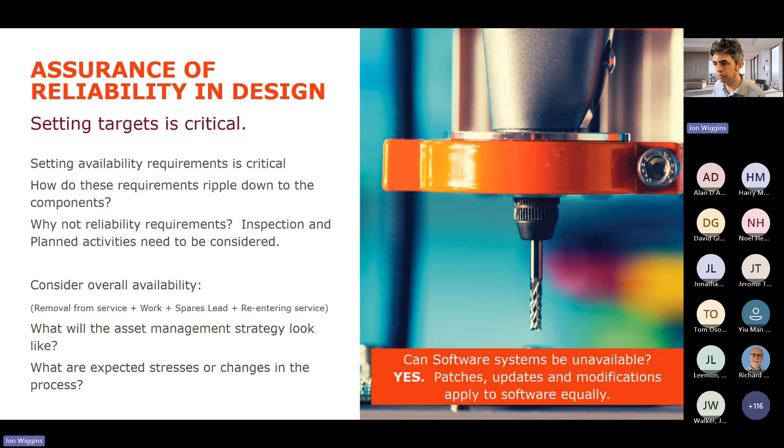Once you have that framework, make sure you've got a strategy in place for that system. At the very beginning, how am I going to maintain it? Benchmark it. Is that achievable? Does the technology exist? Do we need novel technology? Can we look somewhere else? And finally, how are we going to communicate this, not just now, but into the future? How can we sustain this strategy past the initial deployment?

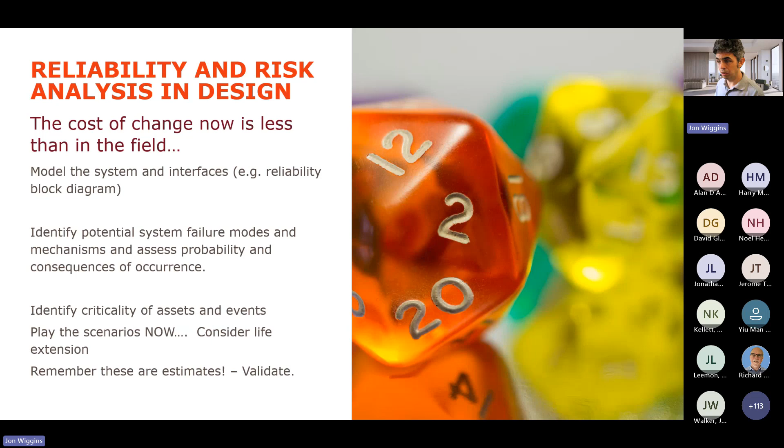So, reliability and risk analysis, this has been around for many years. We can measure things, we can model things, we can change things. These are based on assumptions, but like we said, these assumptions can be checked. Do your basics, do your modelling. The results can be surprising, and a good example of this is the high-speed train. We're all well aware of this in the UK. A very successful unit with a hidden secret. They knew it had reliability issues at day one.

What did they do? They thought around the problem and said, well, if we put the power cars at each end and have separate power cars, if a power car fails, the other one, A, can rescue it, and B, we can just change one power car. The previous solution would have been to put both engines into one power car. One engine fails, the whole power car's out. So they understood the failure modes and the impact on the service, the impact on safety, the impact on British Rail's reputation, as it was then.

Today, we add the extra factor of security in. We're in a connected world. We must look at the impact of failure on our security. Can a failure be detected? Can it be repaired? If not, what do we do about it? Is it critical? What is the criticality of that failure? Understand those factors.

And finally, test it. Test it, test it, test it. You've made an assumption, test your assumption. What if it fails? What's been done elsewhere? Can we physically verify it, or do we have to do a field trial? Look at how an assumption can be verified.

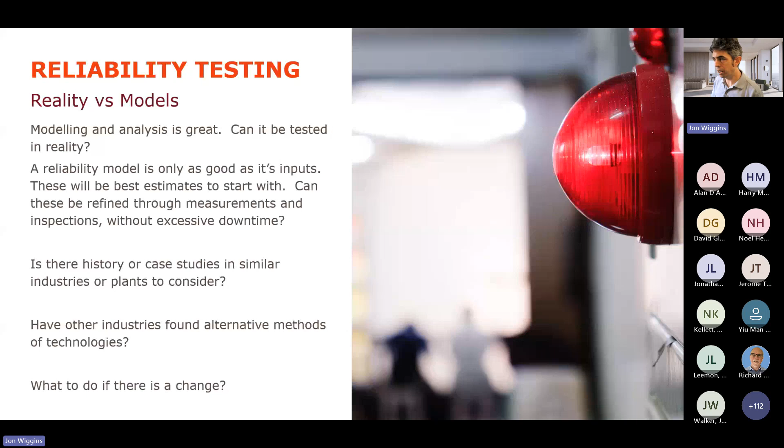A good example of this and of using something from another field is PAC-SCAN for cooling towers. This is something I was made aware of through a member of this group. The idea is to prevent people entering harsh environments. So we can monitor, we can reduce downtime, we haven't got to take the cooling tower out of service. And we use two well-established technologies in new environments. The result, we can extend PPM hugely, increasing availability through the use of some actually quite well-known technology in different fields.

Why is it that a plant will always fail? Why is that important? Well, unfortunately, failure is a fact of life. Failure is a fact of operating machinery. Whilst it is an annoyance, a nuisance, it's also data. We must make sure that we have the means in the system when we design it that when it does fail, we understand, we can record it, analyze it, correct it. This is the most basic form of learning, but it is so often forgotten when we are designing a plant.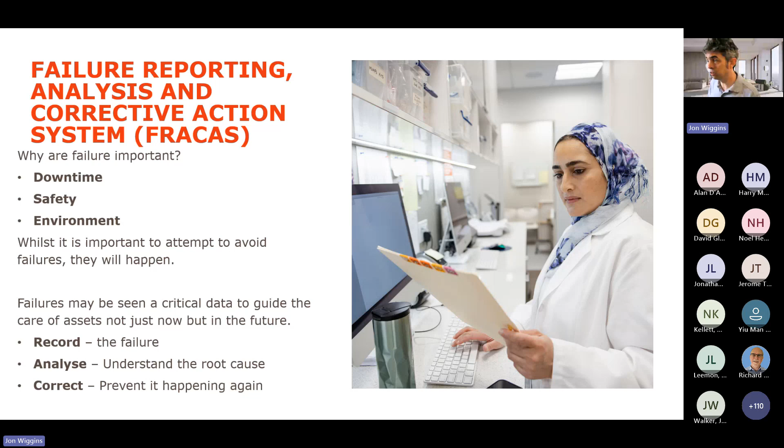Another area that's widely forgotten is our supply chain. When we're specifying equipment, we specify it to suppliers. The most common failure is a failure of specification to that supplier, because we assume that the supplier knows what we know. They do not. They do not usually know anything. We're the expert. We need to make sure what we're telling them is the complete story and document this. Make sure they've got everything they need to do their job. Be sure that is a very key failure point in this chain.

And 2 minutes, Jon, please.

I know. Okay. Identify, manage, and monitor. This is a Deming cycle. So when we look at management of change, we need to make sure we've got a process to change. That process is in place, it's known, and it's checked.

Finally, a very good example of good learning, and a surprising one: a supersonic car. Richard Noble learned from the people who went before him. He literally interviewed the people who went before him, and what he learned was that a supersonic car spends 90% plus of its time being maintained.

These world record cars are usually being maintained, so when he designed SSC, he designed it to be maintained. In his books and speeches he puts that as a key factor in the success of Thrust SSC: that they could turn it around quickly, they could maintain it quickly. He looked at the human capital who had gone before him and the lessons they had learned. The structural capital, Thrust 2, gave them loads of data.

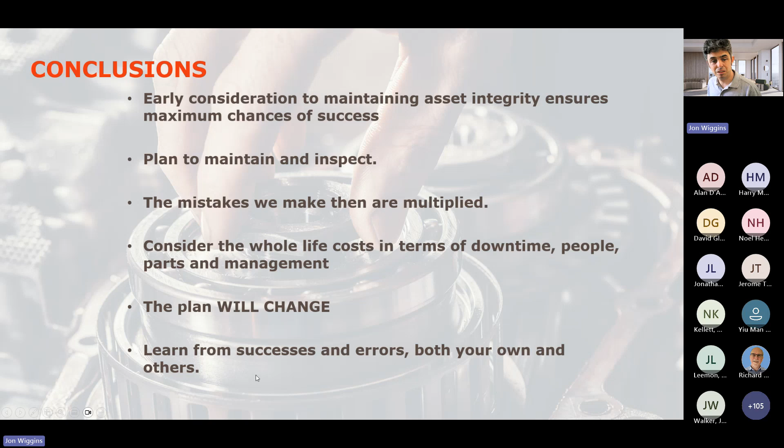So in conclusion: start early, plan for success, plan to maintain - if we don't do it, it will be multiplied. Consider whole life costs, not just the immediate in front of you. Accept that change is a constant - things will always change - but make sure our processes are constant. Learn from successes and errors, both your own and others.

With that, thank you very much, and I hand you back to Alan.

You saw in case number 2, which was the European refineries, that across Europe it's a lot more prescriptive than the UK. So it's not as David Glass described. In Europe, it's more prescriptive around having to go inside equipment, having to pressure test and so on.

But these are the sort of KPIs that were delivered across the study that we conducted as TÜV Rheinland. We've changed some of the percentages, so we're not sharing customer data out. But the main one was to make sure we eliminated unplanned outages.

There's lots of potential to actually reduce turnaround size, reduce turnaround duration. That reduces major accident hazards, and also reduces costs at the same time, and takes out very complex events. So that's what we want to try and do as the IMechE, and hopefully do it together as an industry. So what are the next steps?

This webinar will go online, so in the next 2 weeks we'll have a recording of this. There'll be 2 poll questions coming up, to pull together a core team to support this. Hopefully some of the panel members will be part of that core team, and we'll develop a term of reference for the JIP, objectives, schedule and deliverables.

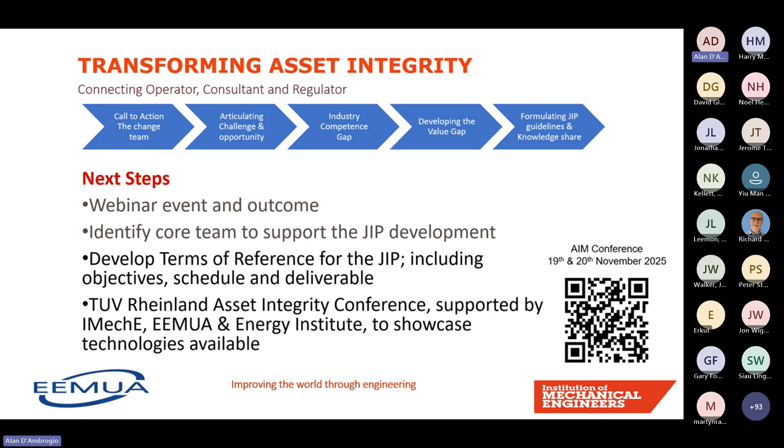We do have a face-to-face event on the 19th and 20th of November. There is a QR code for that, as you can see on the right-hand side. But the aim is to actually get the movers across from this perspective of how we can actually improve asset integrity together.

Okay, so sorry, there should have been, hold on, let me just see if I can make this work now. Technology is a wonderful thing, except when it don't work. It's worked all the way through. I was going to say, let's see the last one, because the last one's important. If this doesn't work, we're going to have to do it through the questions and answers in Teams.

Well, the other thing is, we can just go through some of the Q&A while you get that working in the background. So we'll do that. Yes, I think there's been pretty lively discussion in the Q&A and the chat. I just picked up, I think there's sort of 3 unanswered questions. I'm not sure quite who to field them at. I'm going to maybe start with the first one.

Question from Stanislav McDonald: is vibration related fatigue a common issue relative to other types of integrity risks? David, do you see any events or incidents that come from vibration-related fatigue commonly? In our sector, I would suggest less so, and we're largely dominated by corrosion. That's not to say they don't happen, but in other sectors, yes, particularly where there's moving machinery. For example, our fairground colleagues have a lot of trouble with fatigue. But generally, we're largely dominated by corrosion, I would say.

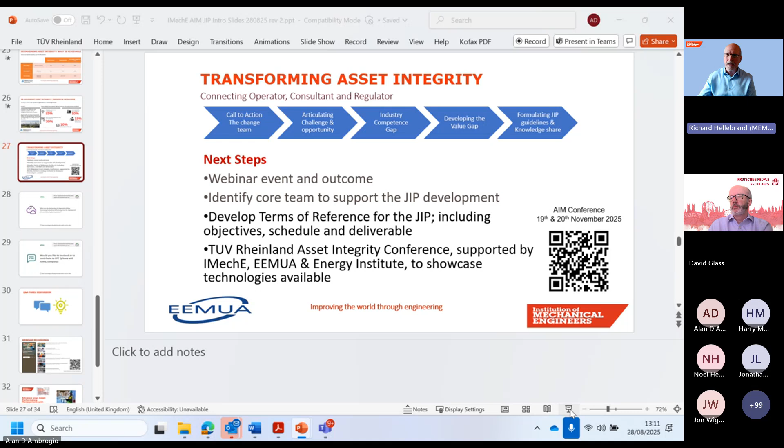I haven't got the reference at the moment, but if you haven't used high-speed cameras before for vibration issues, the amplification techniques are fantastic for dealing with hidden vibration issues. If you don't know about that, or want to know a bit more about it, I'm not an expert, but I know someone who is. So just send me an email afterwards.

Second question, from Jason M: with remote inspection, if we see an issue, a risk assessment and planning for a visual inspection must be done, clearly. Is that a common approach we should apply across the whole industry? In other words, if there's anything identified in a remote inspection, do you have to stop and move on to a physical one. Still looking at David again. We've seen this in a few instances, and it provoked quite a challenge.

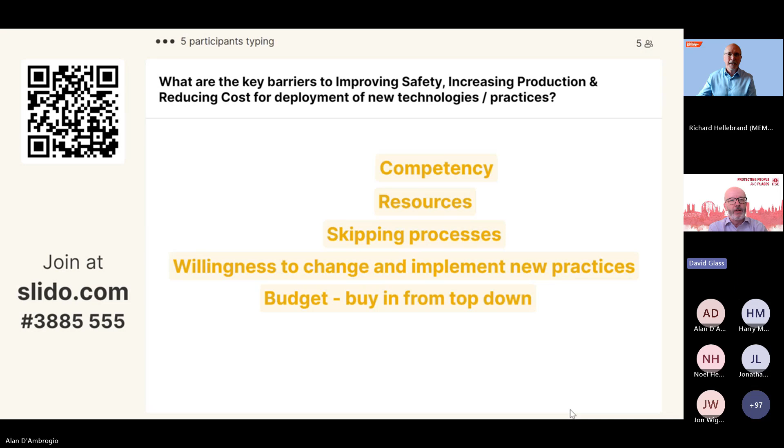For example, a vessel which is entered remotely, where they discover a defect on screen, or what might be a defect on screen, and then the argument ensues. I've had differences of opinion as to what's on the screen compared to operators.

We would generally ask, for example, there was one instance of what we thought may be a crack in a vessel. Is the option to go in, or is the option to unclad at that point in time, use NDT from the outside and determine if the crack actually exists or not? I think generally findings have to be pursued until there's a reasonable amount of certainty that you don't have the defect. How you do that depends on what you find.

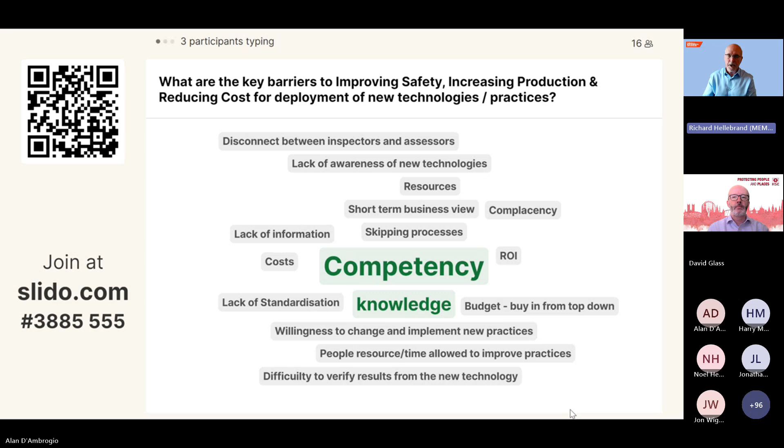Okay, jumping back to the vibration question, Harry chipped in on the chat that vibration and small bore fatigue are common in upstream, especially in compressors, and the Energy Institute has guidance available about that. If you want more information, talk to Harry, or even talk to me. I'm a fellow of the Energy Institute as well as the IMechE.

The final one from Graham Horton: does the chemical being stored have any prohibition on the use of non-intrusive inspections? I can speak for Great Britain in terms of its legislation, and perhaps reiterate the slides. It's generally a goal-setting regime that we have. We don't dictate generally how something should be done, but point to relevant guidance.

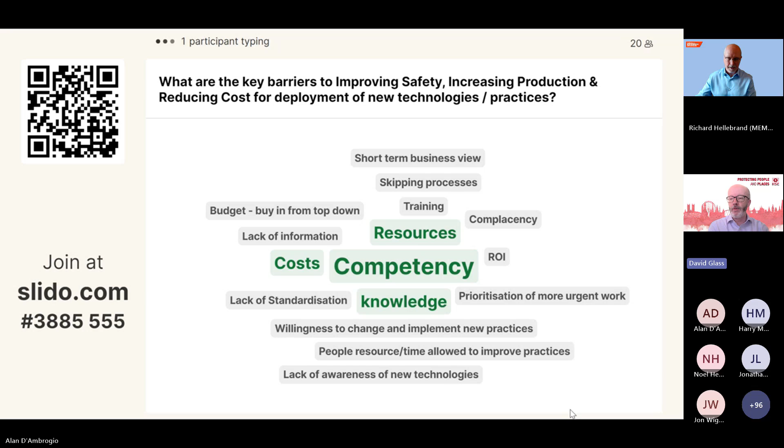So, for example, we have our own chlorine covenant. We have Eurochlor and our GEST guidance for chlorine. There's ammonia guidance. There's often guidance which is substance specific, which we would then point to as the benchmark. And if that substance or storage and processing of that substance dictates, or guidance suggests, that you should follow an intrusive path, then that's what we would adopt as the benchmark. But that's guidance, I just throw in as well.

My company's a member of Eurochlor. Almost every year they run online training, 11 two-hour sessions for Eurochlor members on safety and technology of chlorine handling. I hope more trade associations and even EEMUA and other people start to think about doing things like that, because it's brilliant.

There were other questions I think they've sort of been muttered about during the chat and answered. Alan, you've obviously had time to fix your problems. My problems have been fixed, thanks for that, Richard.

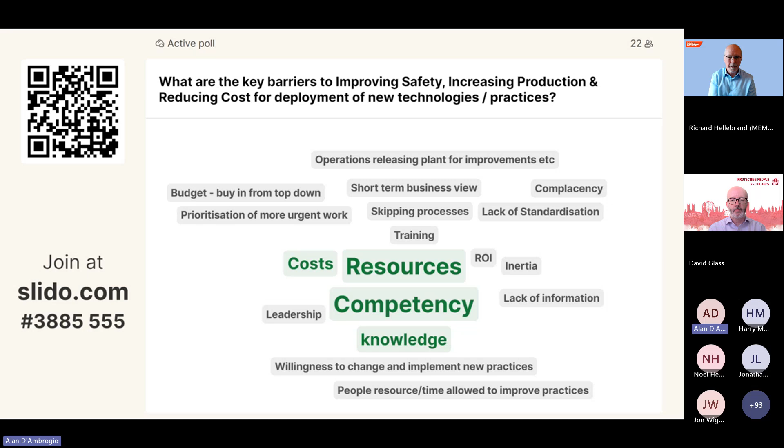So we put the question on the screen now: what are the key barriers to improving safety, increasing production, reducing costs for deployment of new technologies and practices? We've had a number of responses already: budget, cost, resources, competency, knowledge, willingness to change, and so on. Maybe this needs to be compared to the previous one around Formula One and the wanting to win. I do think a lot of people at the top don't see the overall cost of asset integrity because it's spread across many different budgets.

That's given us a good number of responses. So there's one last poll question: would you like to be involved or to contribute to the JIP? Please add your name and company. At the moment, all contributions are time contributions, not money. We're talking about bringing the right expertise together to help move industry forward so we can take advantage, in a safe manner, of advanced technologies, and utilize those to operate more safely, but also more efficiently and at reduced cost.

There are challenges, and you've heard lots of them from Richard's presentation at the start, and David's presentation as well, which talks about a lot of the challenges, especially from process safety, maybe from where NII hasn't been so successful. So let's learn from those, and let's see how we can actually make this work.

Alan, I know I'm always chatting, but I'll chip in as well. Although I talked about process safety today, I hate turnarounds. At one company I was in, when I joined we had two one-week turnarounds per year. I moved that to one every four years, and was moving it to one every five years. It's not impossible, and I'm quite happy to tell people how we did it. It's not easy, but when you think of the huge impact on costs and output of a turnaround, if you can avoid them safely, it's well worth the journey.

And final one, we look forward to hearing from you. So back to questions and answers. Anything on any hands? I've not seen anything come in other than people saying thank you.

I think some of you have got our email addresses, and you can always follow up with questions, or if you want to start a conversation, I have no problem at all with that. We're just trying to help everybody. I'm putting my email address into chat if anyone wants to follow up, but come back to any of the speakers. What we want to try and do is see how we can make this industry more profitable and safer as well. Safer first, then more profitable. Let's make this industry safer, and the two going hand in hand.

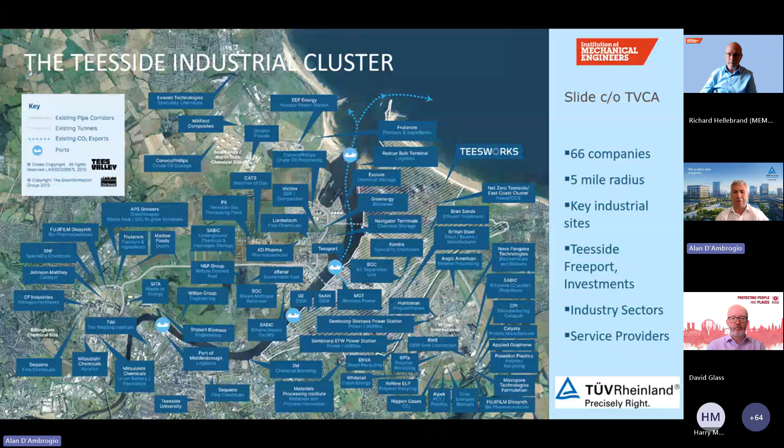I totally agree, Richard. But I think a lot of the skills sit in the IMechE. So I'll just share this one slide, which I've used before. It's not my slide, it's from the Tees Valley Combined Authority, but it shows the level of fragmentation. This is Teesside. 66 different companies in there and so on. If you looked at this 35 years ago, it would be very, very different - a much higher level of concentration, much more integrated chemical plants, and not so many small operators. And that's before the hydrogen revolution starts and we get lots of small hydrogen producers popping up around the country. That's where I think the IMechE and the Energy Institute need to play a part to make sure we retain knowledge and skills, and people are able to bring best practices across those sites, because they're not the BPs or the Shells or the Chevrons on that list.

Yeah, and all the people in this webinar, although we've got day jobs, we're all volunteering on this stuff because we're worried about this and we want to help. Right, I think at that point we're just about half an hour overrun. Okay, Alan, so okay, all right. Thanks for chairing it.